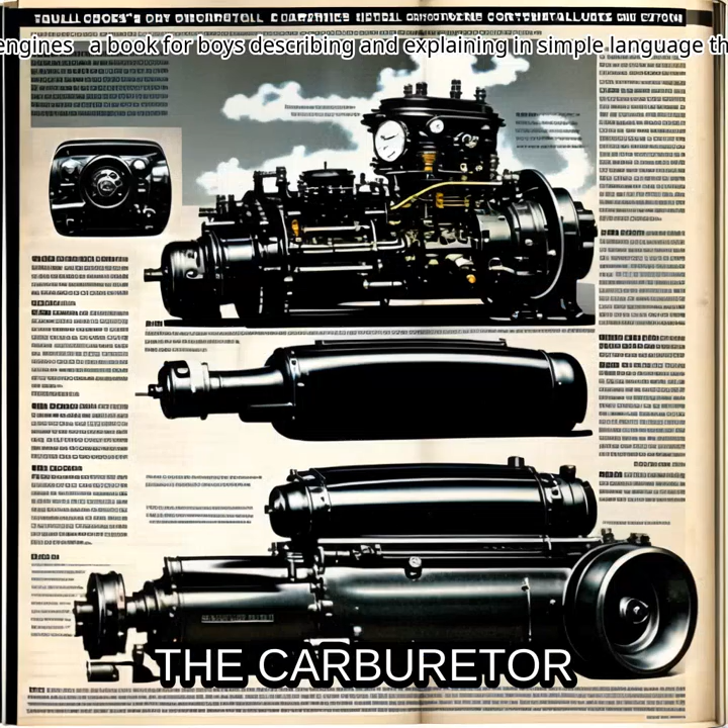The carburetor, or mixing chamber, as it is sometimes called, is a device used for obtaining an explosive mixture of gasoline and air. It consists, as shown by the accompanying drawing, of two principal parts, an air pipe and gasoline pipe, the latter running through the wall and discharging into the center of the former.

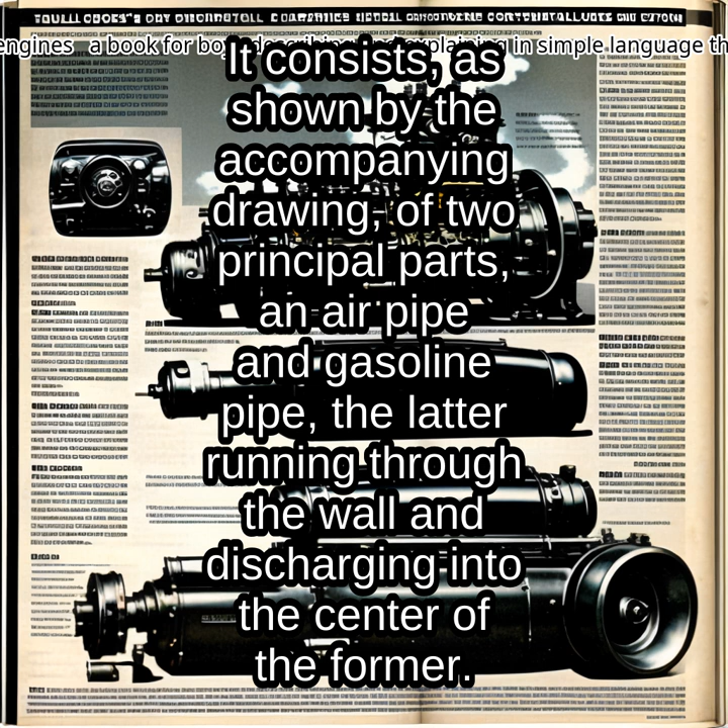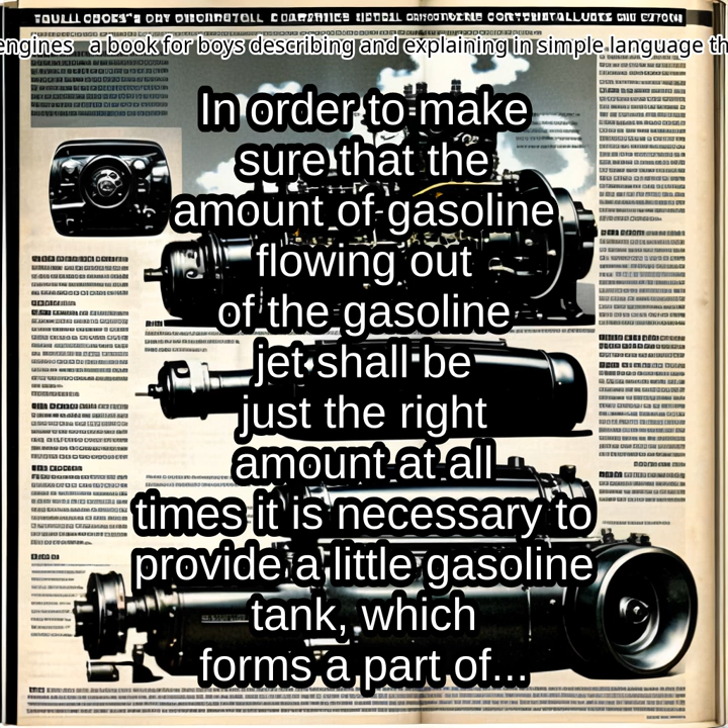In order to make sure that the amount of gasoline flowing out of the gasoline jet shall be just the right amount at all times, it is necessary to provide a little gasoline tank, which forms a part of the carburetor casting itself, which is known as a float chamber, so that the amount of gasoline in the main tank will not affect the amount discharged at the nozzle.

You can see why this is necessary if you think of a water tank or a dam. If the water was almost up to the top of the dam and you should bore a hole through the wall somewhere near the bottom, the water would flow out faster than if the water was low.

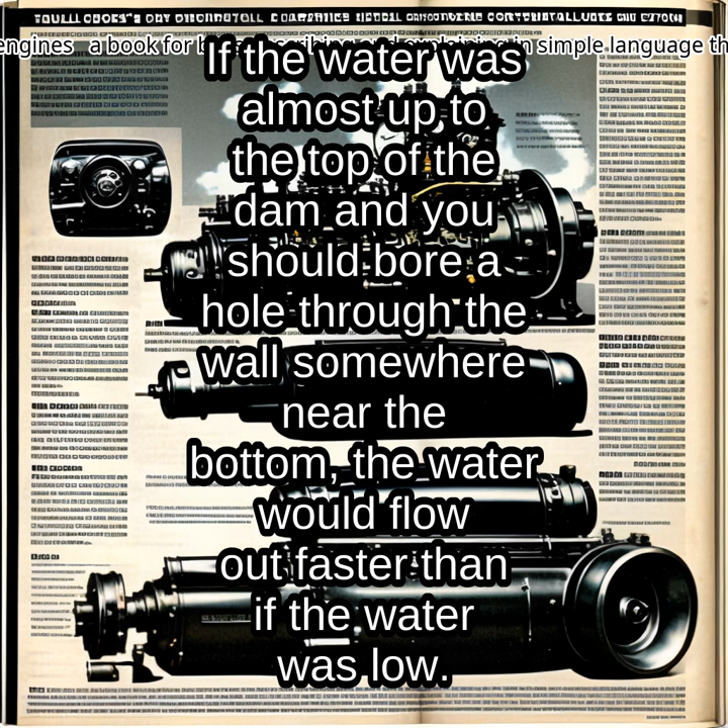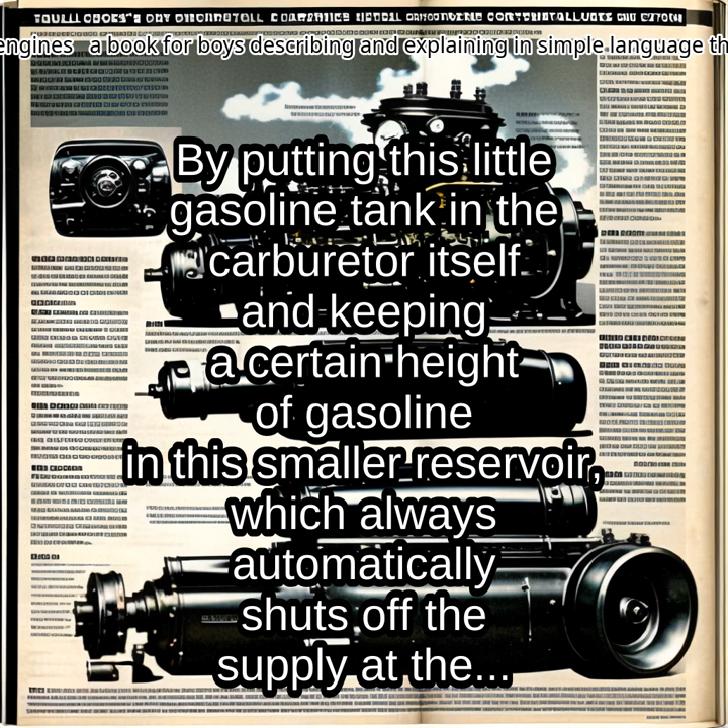By putting this little gasoline tank in the carburetor itself and keeping a certain height of gasoline in this smaller reservoir, which always automatically shuts off the supply at the right time, you can make the pressure, and therefore the flow of the liquid, always the same. The illustration will show this plainly.

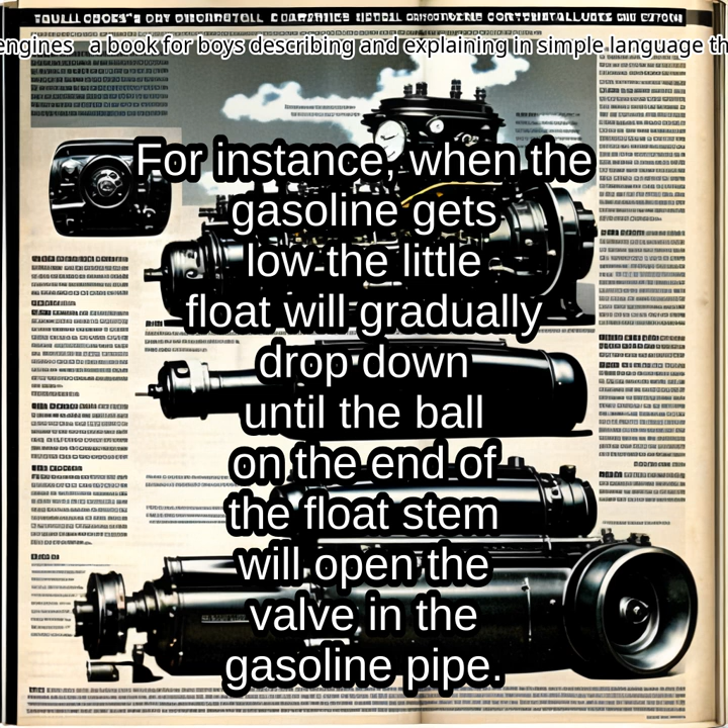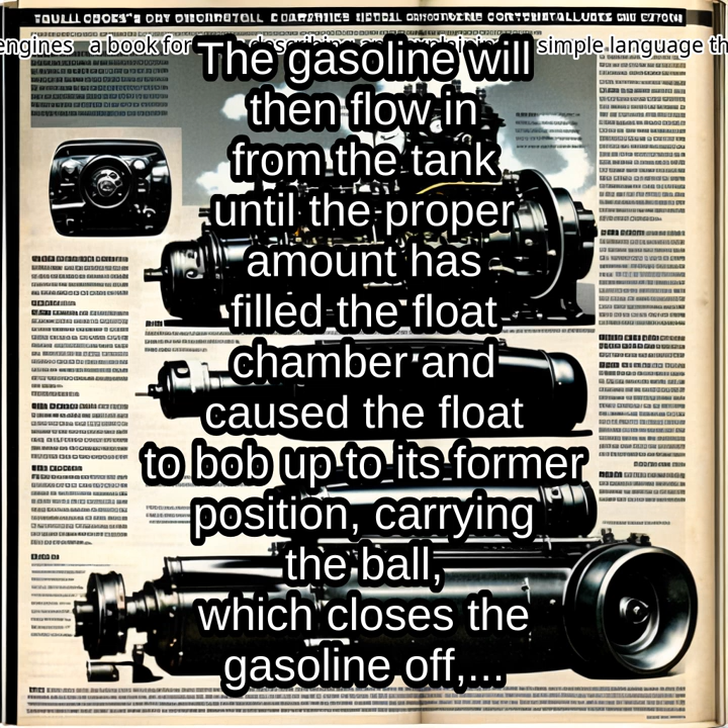For instance, when the gasoline gets low, the little float will gradually drop down until the ball on the end of the float stem will open the valve in the gasoline pipe. The gasoline will then flow in from the tank until the proper amount has filled the float chamber and caused the float to bob up to its former position, carrying the ball, which closes the gasoline off, up with it.

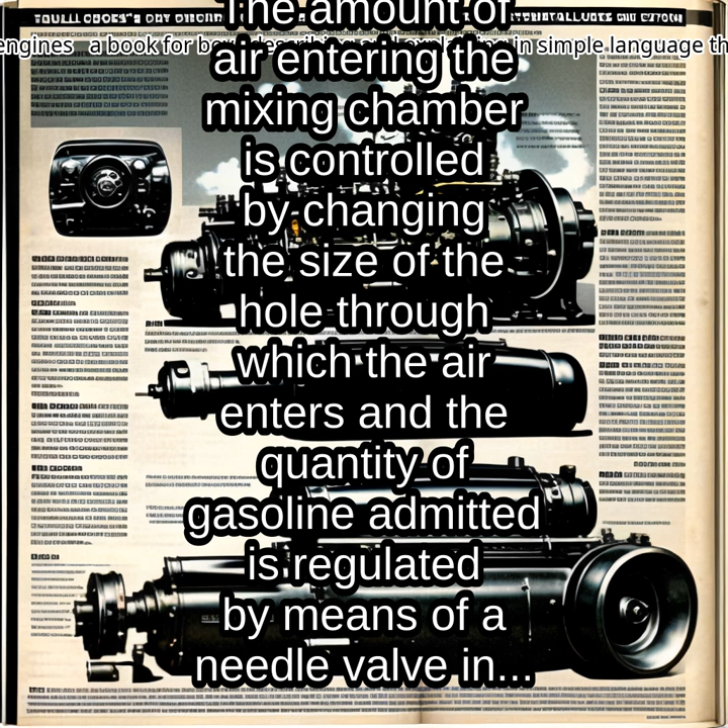By this means, the requisite amount of gasoline is always kept in the float chamber. The amount of air entering the mixing chamber is controlled by changing the size of the hole through which the air enters, and the quantity of gasoline admitted is regulated by means of a needle valve in the gasoline pipe.

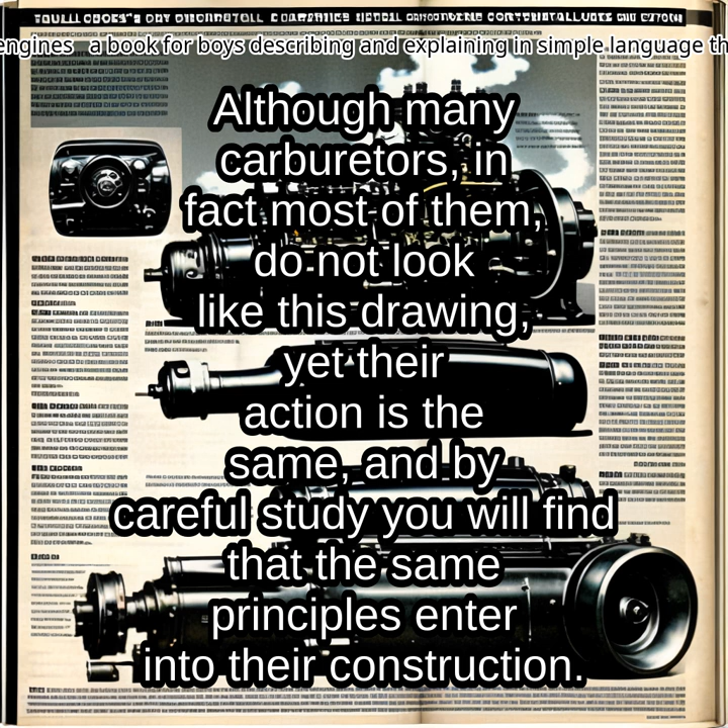Although many carburetors, in fact most of them, do not look like this drawing, yet their action is the same, and by careful study you will find that the same principles enter into their construction. Fig. 22 shows an actual sectional drawing of a carburetor used on a 4-cylinder motor.

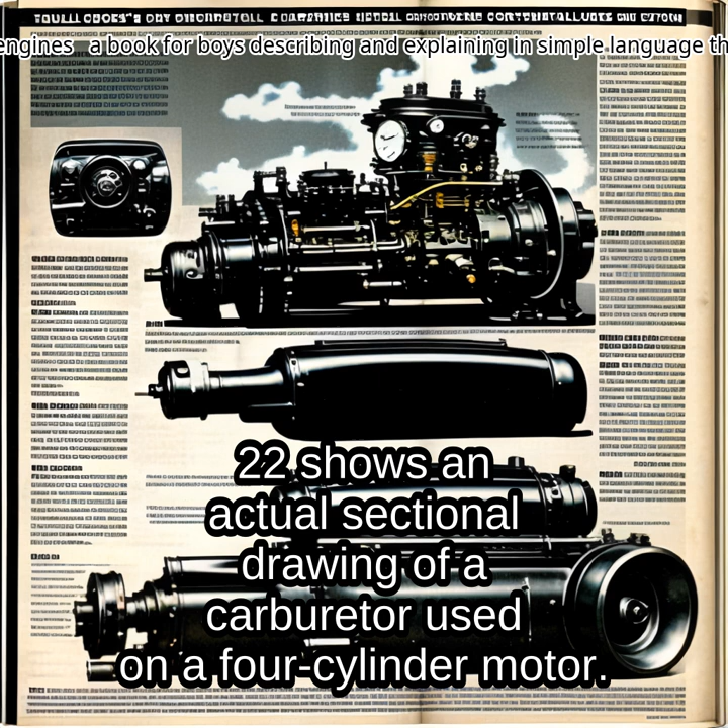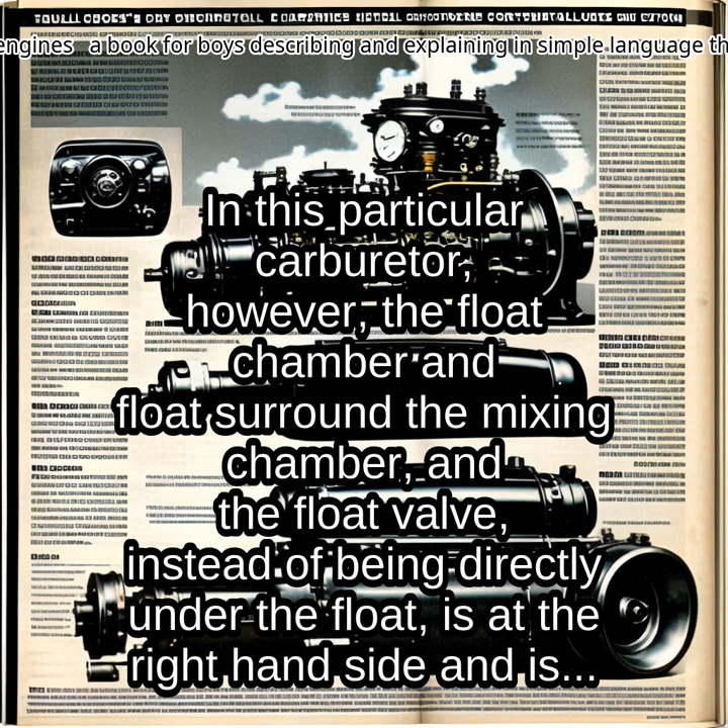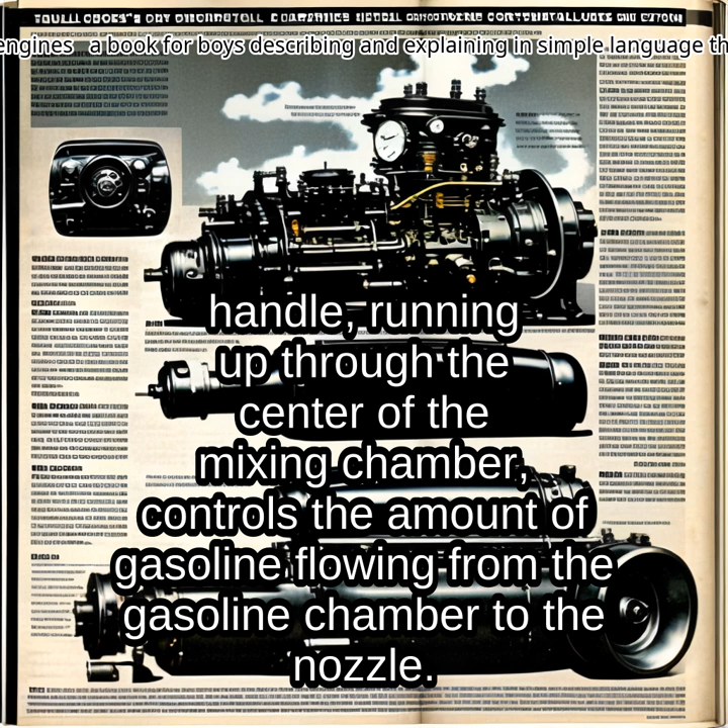In this particular carburetor, however, the float chamber and float surround the mixing chamber, and the float valve, instead of being directly under the float, is at the right-hand side and is operated by means of a lever. The needle valve, which is the little round rod having a T handle running up through the center of the mixing chamber, controls the amount of gasoline flowing from the gasoline chamber to the nozzle.

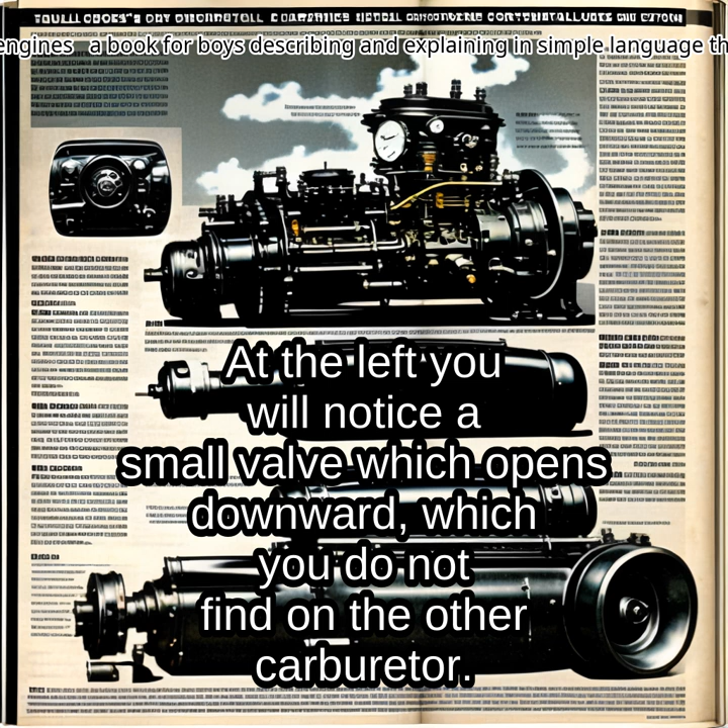The air comes up through the bottom and around the gasoline jet. At the left you will notice a small valve which opens downward, which you do not find on the other carburetor. It is known as an auxiliary air valve and allows a certain amount of air to be added to the mixture, a small quantity of which is sometimes needed to keep the mixture just right.

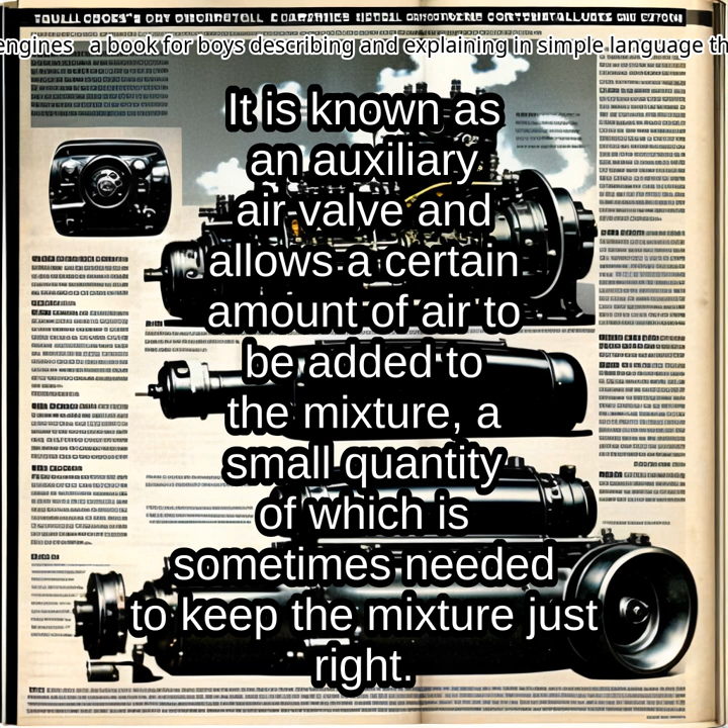The throttle valve, which looks like a damper in a stovepipe and which controls the amount of gasoline vapor going into the engine, will be seen in the upper pipe.

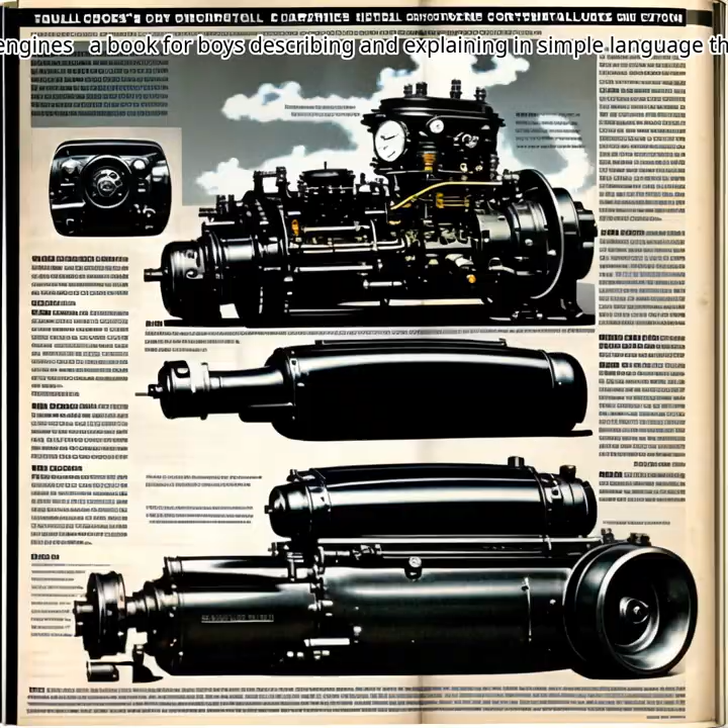The ignition system is the name applied to the batteries, coils, commutator and spark plug which, acting as a whole, produce an electric spark hot enough and at the right time to fire the charge in the cylinder. There are 3 ways in which an electric current may be obtained which have been found to be of practical use in automobile construction.

First, by a dry battery, second, by a storage battery, and third, by magneto or dynamo. You can look up the construction of these things in any good book on electricity, so that I will not explain them further here. As the object of the whole system is to produce a sufficiently hot spark to fire the mixture at the right time, it is sometimes necessary to raise the pressure of the electric current.

When either a dry battery or a storage battery or a certain type of magneto is used, it is necessary to put it through what is known as an induction coil in order to raise the pressure so it will be high enough to jump across the 2 points in the cylinder.

An induction coil consists merely of a bundle of soft wires around which is wound 2 separate coils of wire. The first, known as the primary winding, is of coarse wire, and the second, known as the secondary winding, is a fine wire. When the current flowing through the primary coil is rapidly made and broken, another current of very high voltage is created in the secondary circuit.

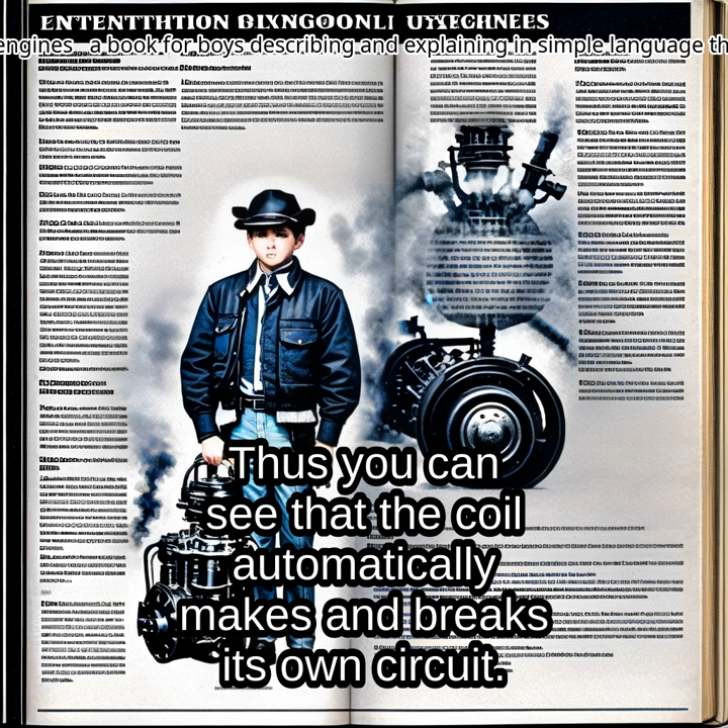When the current starts to flow through the primary winding, the bundle of wires immediately becomes a magnet and attracts the vibrator. As soon as this occurs, however, the flow of the current is interrupted and the vibrator resumes its former position and the action is repeated. Thus you can see that the coil automatically makes and breaks its own circuit. The rapidity with which this is done may be changed at will by adjusting the vibrator screw.

Having thus obtained an electric current of sufficient strength to fire the mixture, it is necessary to supply a device which will automatically open and close the electric circuit at the proper time. Such a device is called a commutator and consists of two parts, one a rotating part, actuated by the engine, which makes a metallic contact with one or more points on a stationary part, the points being so located that contact occurs at the proper time for igniting the charge in any particular cylinder.

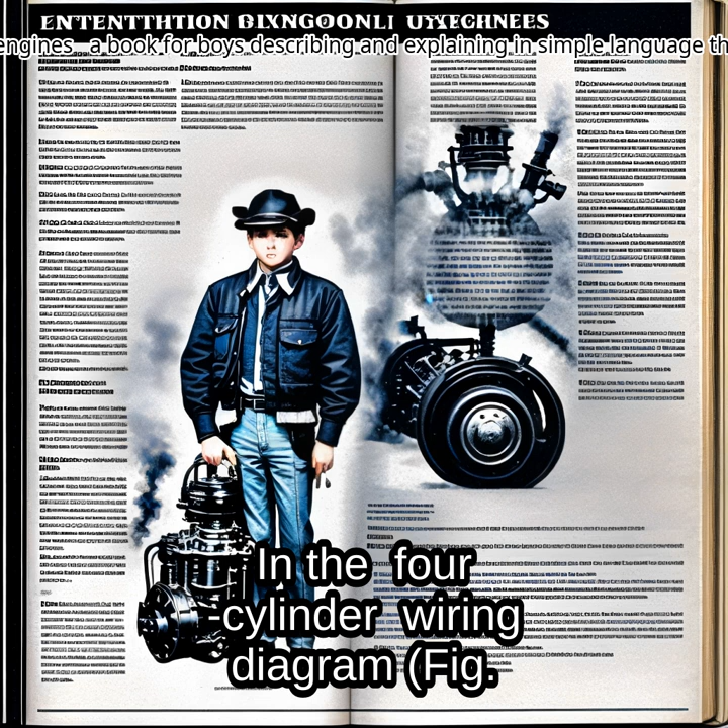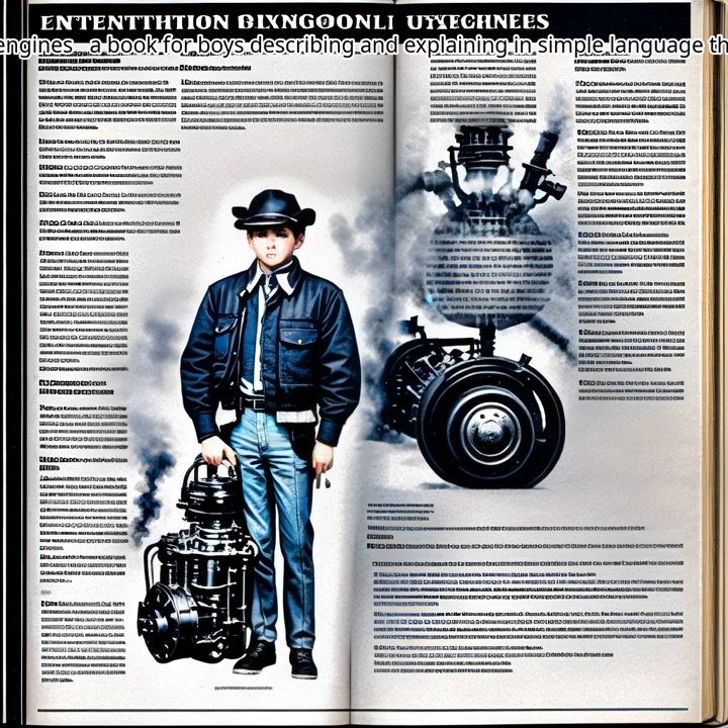The cooling system: In order to prevent the walls of the cylinder from becoming red hot, it is necessary to cool them by some means, and this is done by surrounding the cylinder with a water jacket through which the cooling water is circulated.

In order to prevent the water from boiling and evaporating, thus making the constant addition of water necessary, a radiator is introduced into the system. This radiator is made up of very thin tubes which give up their heat rapidly, thereby keeping the temperature of the water below the boiling point.

A fan is also used sometimes to draw the air through between the tubes, thereby making the process of cooling take place more rapidly. The system is so arranged that the water is drawn from the low part of the radiator, where the water is coldest, by means of a pump, and forced up through the water jackets and back into the radiator again.